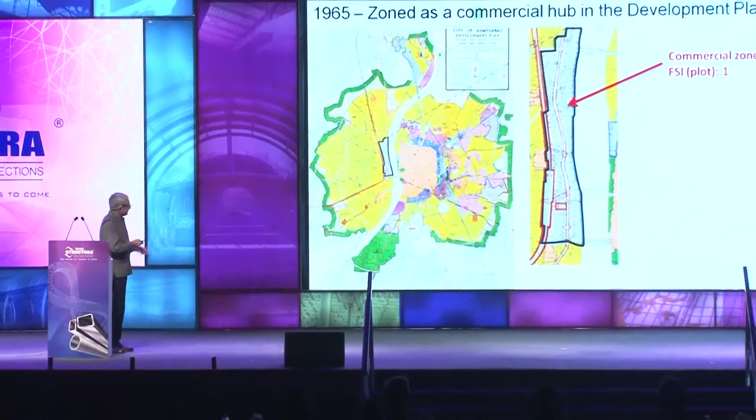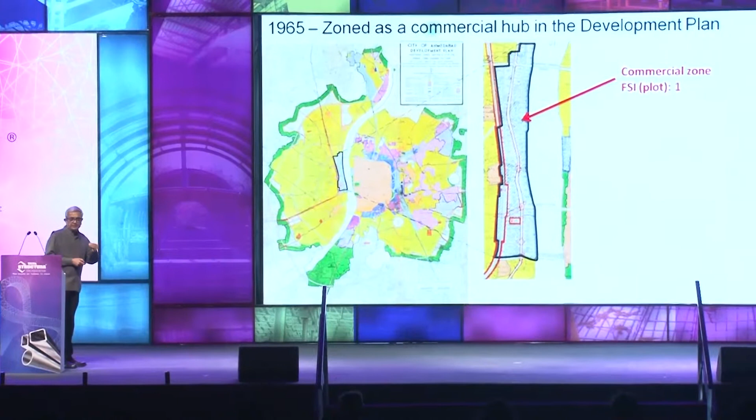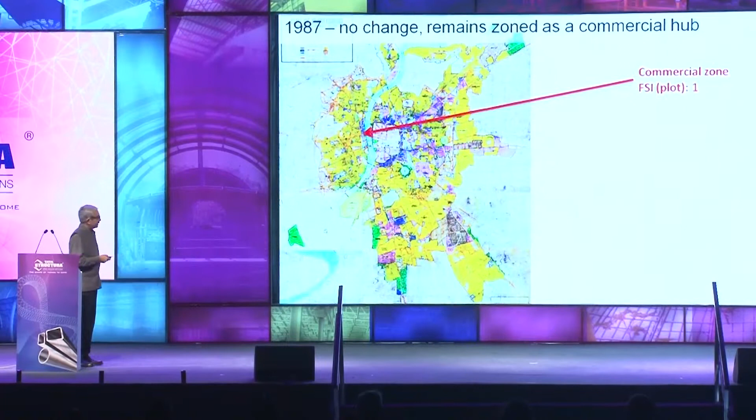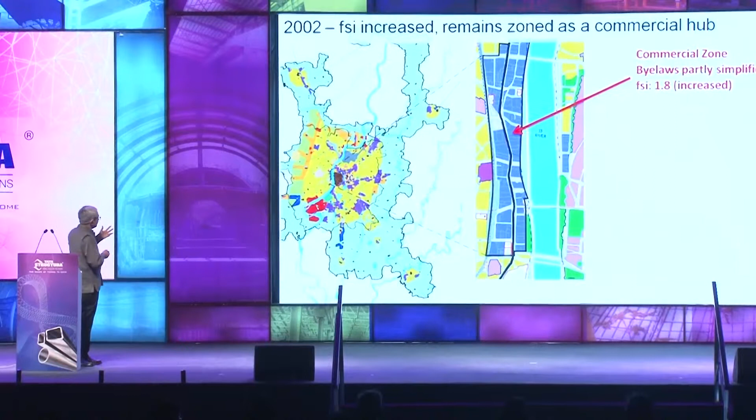In the first development plan of Ahmedabad, this place was marked as the sort of central commercial hub of the city, and like all Indian cities, it was given a low FSI of 1. If you look at the 87 plan, once again, it was marked as the commercial zone, but nothing much changed. In the 2002 plan, its FSI was increased a little bit, and it became, well, little more than what was earlier. Then something important happened in Ahmedabad.

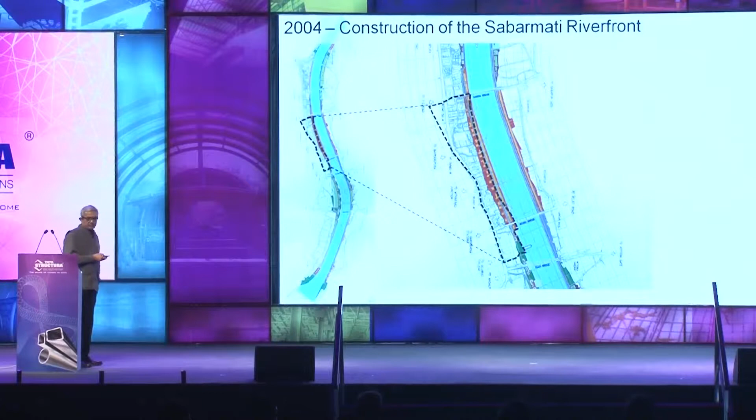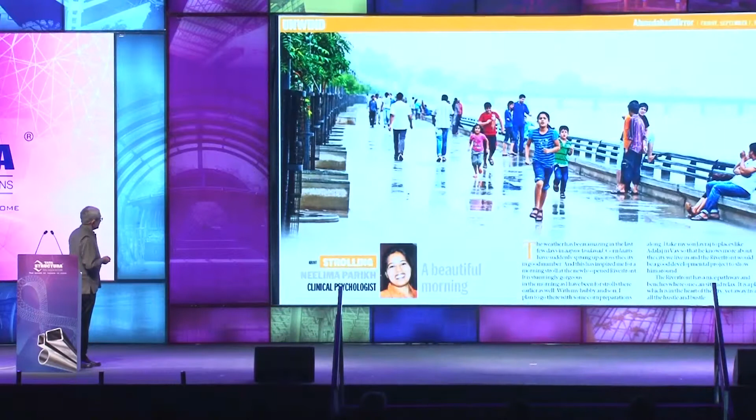Some of you might have heard that the riverfront project was conceptualized and thought out. It started about 20 years ago, and we had a river like this passing through the middle of the city, and like Marine Drive in Mumbai, the two sides of the river bed were reclaimed to create a public space along the entire length, 11 kilometers length of the city. And this is after the work was finished. You got a sliver of land on both sides. That was the public realm for parks, gardens, various things. And today, if you go, this is what you would see in the center of Ahmedabad. And it's already becoming a very important part of the life of Ahmedabad. These are pictures from 2-3 years ago, as you can see.

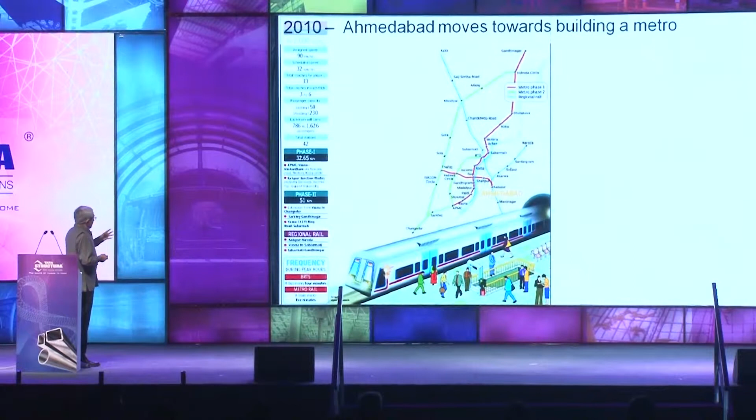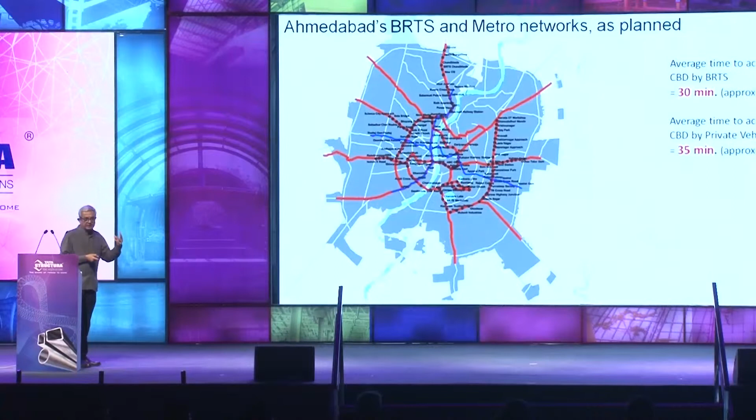Then Ahmedabad also started building its bus rapid transit network that you can see here. And now a metro is under construction. The reason I'm telling you all of this is because of this transportation network that is coming up. Within a few years, it will be possible for people on the outskirts of Ahmedabad to come to the center of town within about 30-35 minutes. On account of this, the demand to build more floor space in the middle of the city is definitely going to intensify. It has already intensified, but it will become more. But you know, like all the cities, everybody complains that the city is already congested. How can you put in more space here?

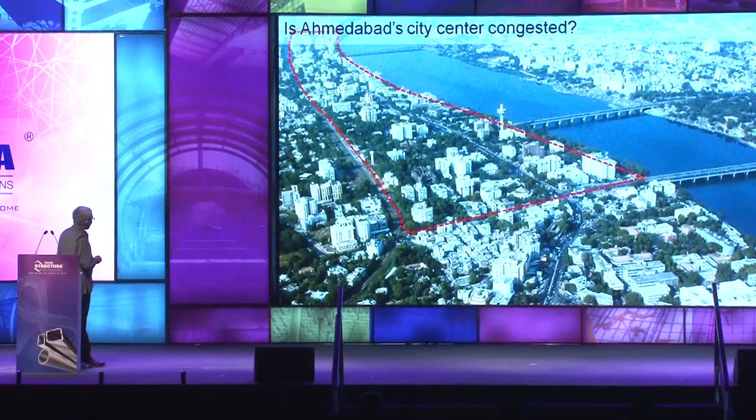Well, Ahmedabad certainly doesn't look like this. In the center of Ahmedabad, there are still small buildings like this. Even in places like Mumbai, Calcutta, there are small buildings like this. And the new buildings coming up are also pretty tiny and small. Ahmedabad city center, we all realized, like many Indian city centers, is not congested. It is just poorly planned. What is poorly planned here?

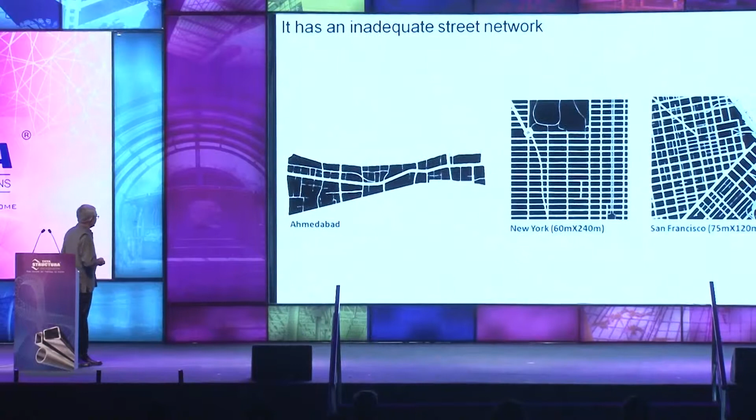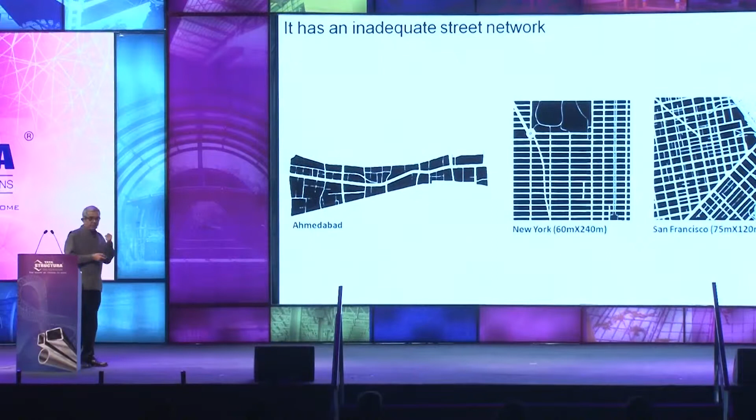First of all, the street network. These are all at the same scale. You can see on the left-hand side is Ahmedabad, and you can see New York, or you can see San Francisco, all of them at the same scale. You can see that New York and San Francisco have a lot of built density, but they also have a very nice grid of streets, which is what makes it possible to have a lot of density in the center. Ahmedabad doesn't have that grid of streets.

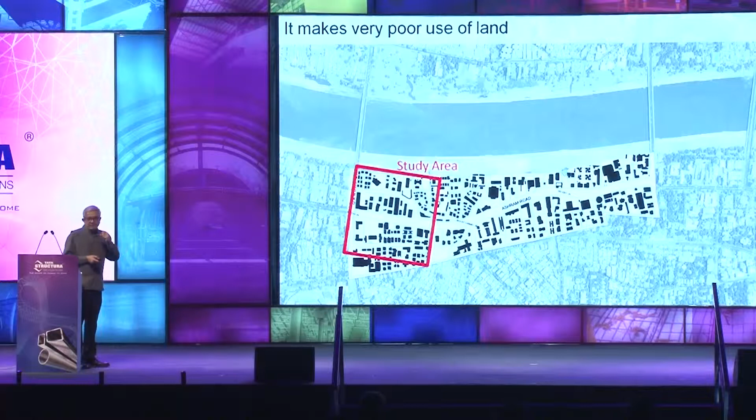Ahmedabad streets are not at all pedestrian friendly, while we have all been abroad where they're very pedestrian friendly streets. Actually, if you look at it, and this takes a little bit of attention, the way our cities in India use land is very, very poor.

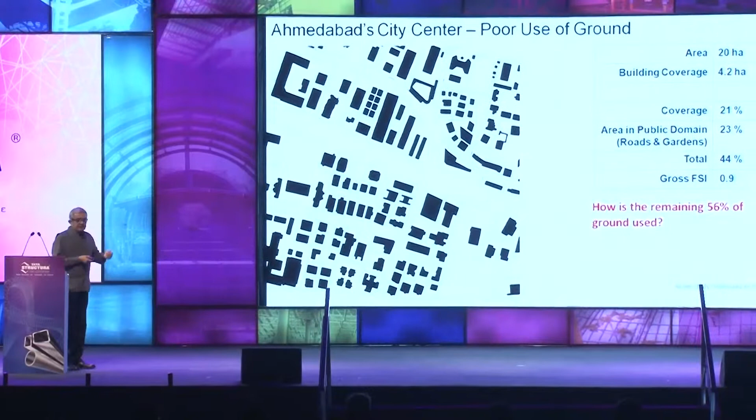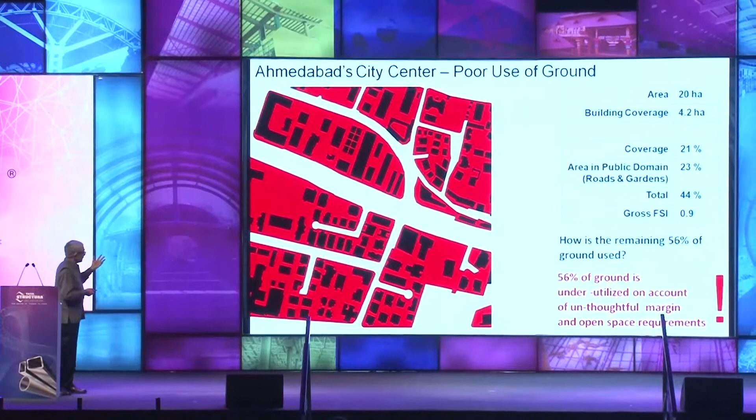If you look at the center of Ahmedabad, like many cities, in this area the buildings cover only 21% of the ground. The streets cover 23%. So where is the remaining 56% gone? Well, all of it is gone in the wastage of land around buildings, which is required because of our building regulations.

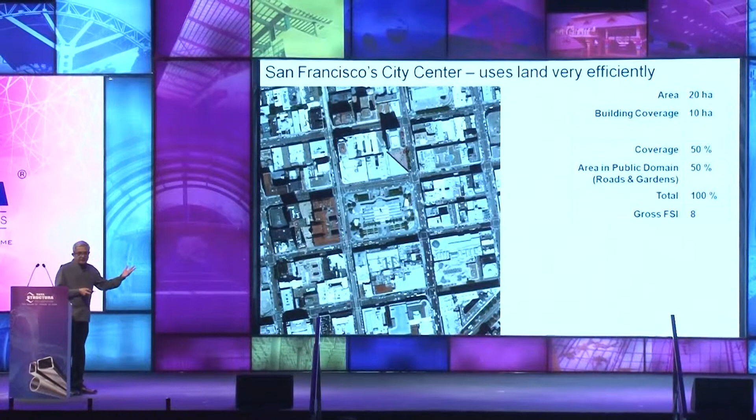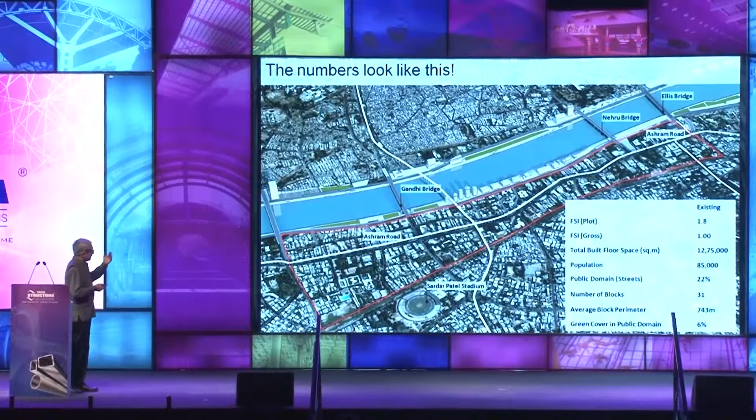If you take San Francisco, half the area is in streets and the other half is under buildings, as you can see here very clearly. This is the buildings and the rest of it is all streets. That is why it doesn't seem congested. Well, Ahmedabad, if you look at this city center area, has a very low FSI of 1, and it has only 22% area in streets, and it has only 6% green cover.

So we have to change this. We have to make this different. Why can't Indian cities be like these cities, or the cities that we see here, which have a lot of floor space, a lot of infrastructure, and are also well serviced? Well, the plan of Ahmedabad to tackle this challenge is as follows.

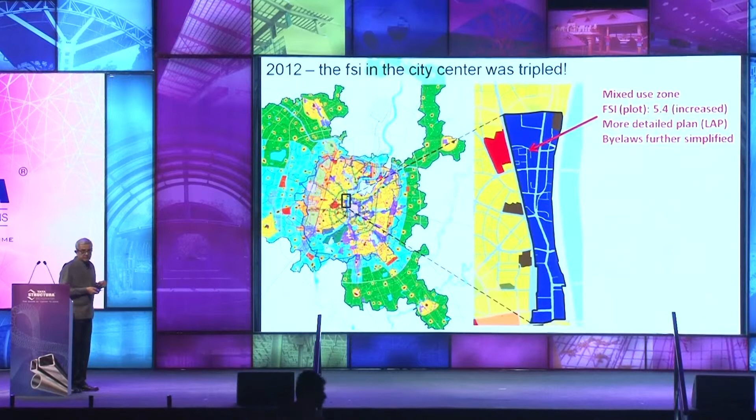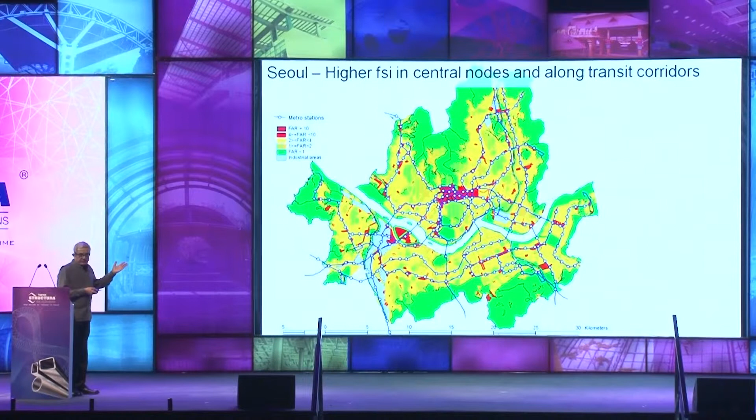The FSI of Ahmedabad was first increased. In fact, it was tripled from 1.8 to 5.4. Not only in the center, but along all transit corridors, it was tripled. This is in keeping with cities like Seoul, where you have high FSI along transit corridors, or like Curitiba, where also you have high FSI.

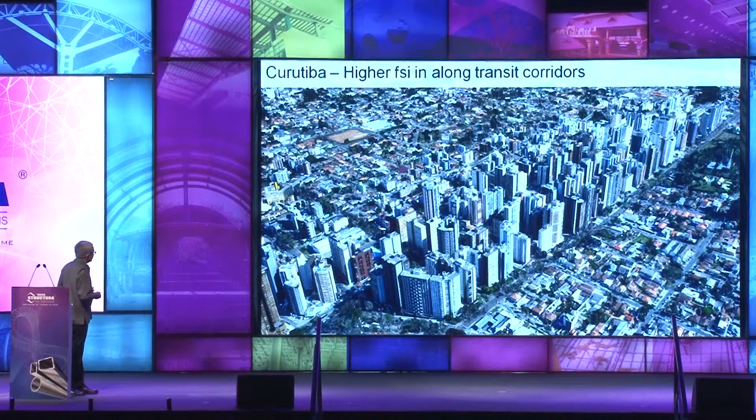But increasing FSI is easy. That requires only writing regulations. The challenge is to ensure that allowing more development does not stress our infrastructure, that more congestion does not result, and that you actually don't lower productivity. So what is the plan that has been made?

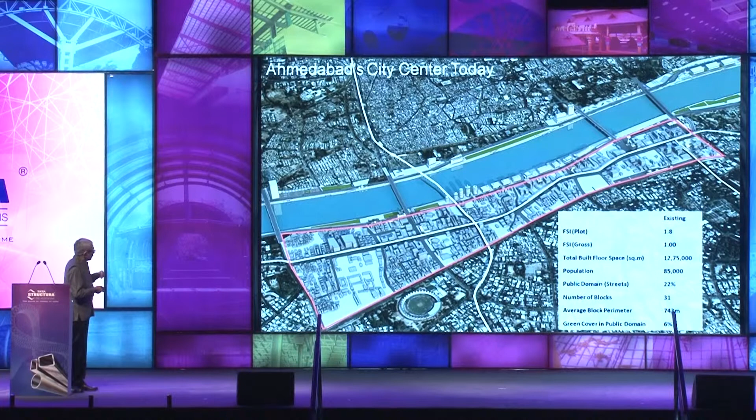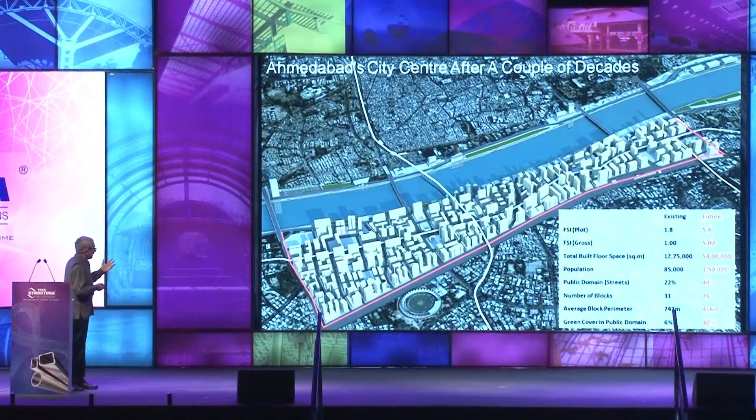Well, actually, Ahmedabad wants to take this area, where the FSI is just 1, and turn it into an area like this. It wants to actually quadruple the amount of floor space that is presently there. And it wants to increase the area in streets from 22% to 40%. So how is this going to be done?

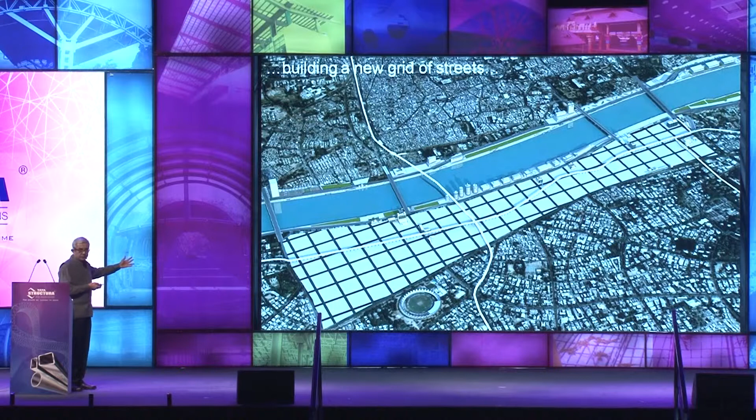Well, of course, you cannot wipe out all the buildings that are existing in the middle of any city and then build some new streets and new buildings. It doesn't work like that. Whatever we do must respect property rights. It must be considered fair. It must be financially viable for developers and also for the development authority. It should be legally implementable, and it should make the lives of ordinary people better.

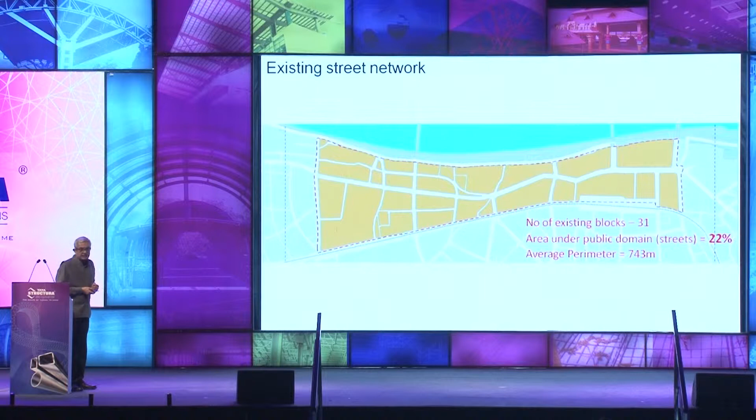So the first thing that was done in the plan is to take such a block, and in this block, introduce very carefully a few streets in the plan. Of course, nobody is going to appropriate the streets right away. Only when the buildings are redeveloped will the streets be taken. So nobody minds these streets being put into the plan. Once the buildings are redeveloped, the street network will improve.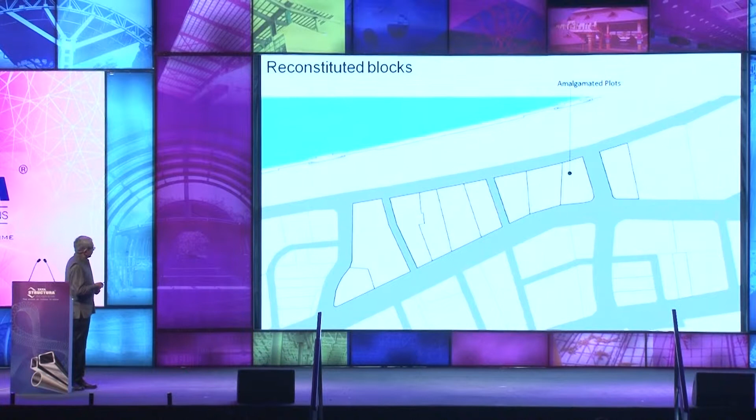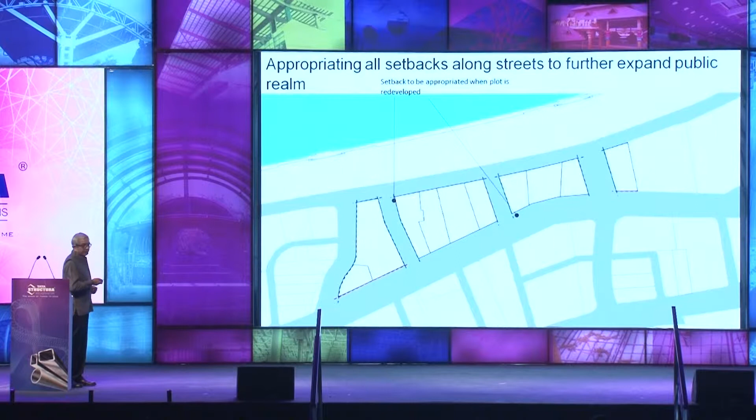Then, for these plots, setbacks are decided. These setbacks are different for the main street and the side streets. The developer is told he is not allowed to keep all of this land. The developer does not mind this because the FSI for that area is given to him to use in the remaining plot. Once you do this, over a 20-year period as the area gets redeveloped, the street network will become like this, and instead of 22%, we'll have 40% of land area in streets.

A small digression, let me explain. A street network is most important. Take San Francisco in 1939. It did not have many tall buildings, but it had a lot of proper streets planned out. Then, over time, they added a lot of floor space, and the city could absorb all of that. Second point to keep in mind: cities redevelop over time.

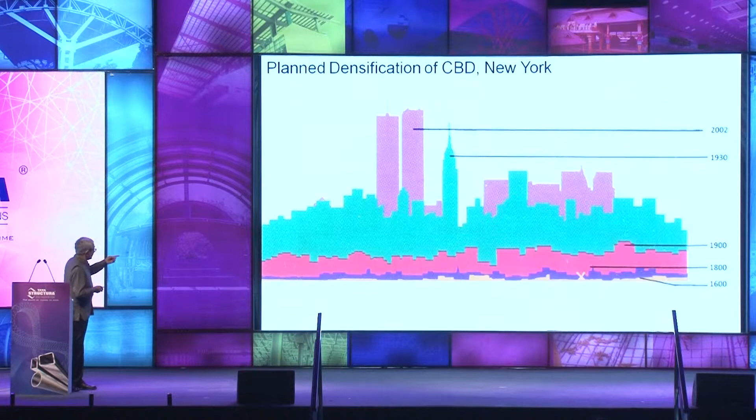It takes a long time to build a city. New York grew very slowly from 1600 to the present times. These are pictures of it. You can see in 1600, nothing existed. Even now, it is being built and added to. Urban infrastructure is not built at one go. When you look at Hong Kong today, with so much infrastructure in the streets and a skyline like this, it did not always look like this.

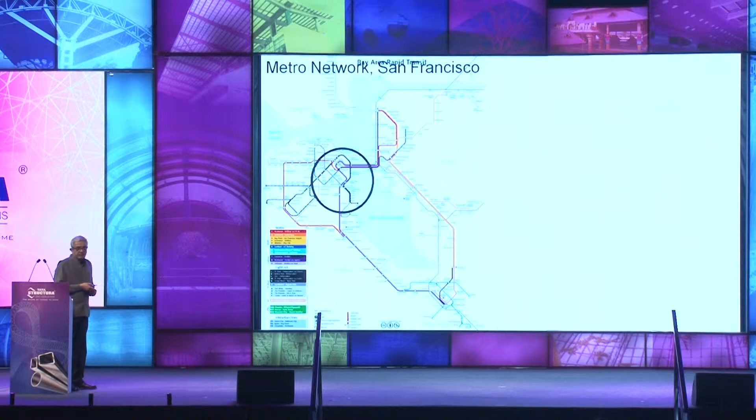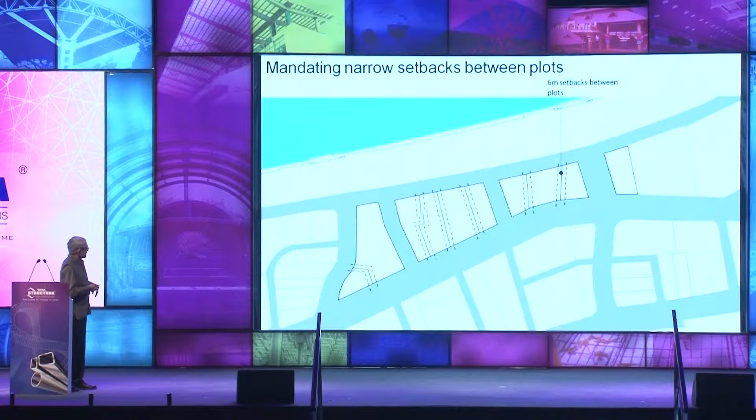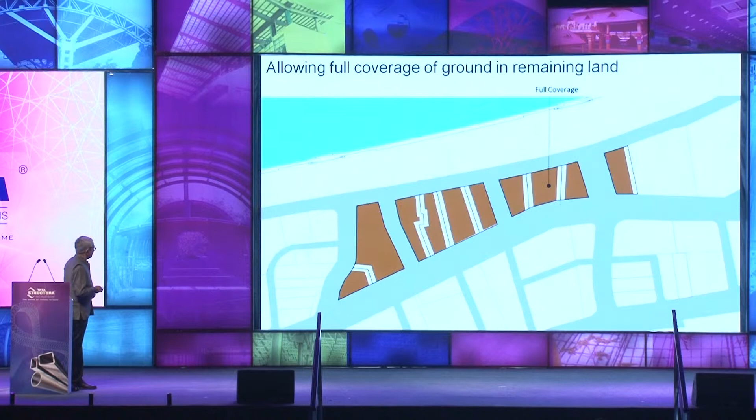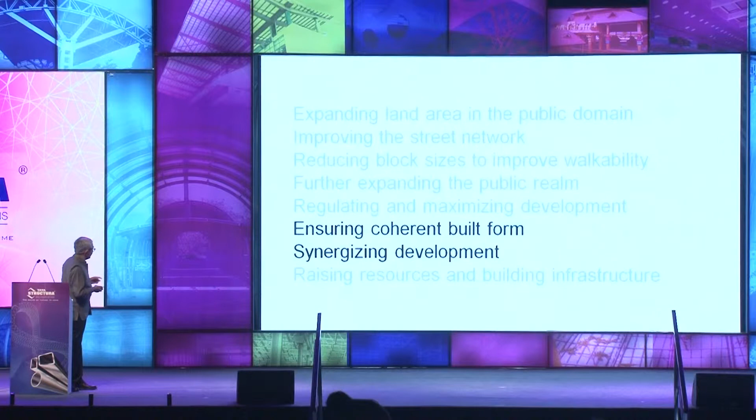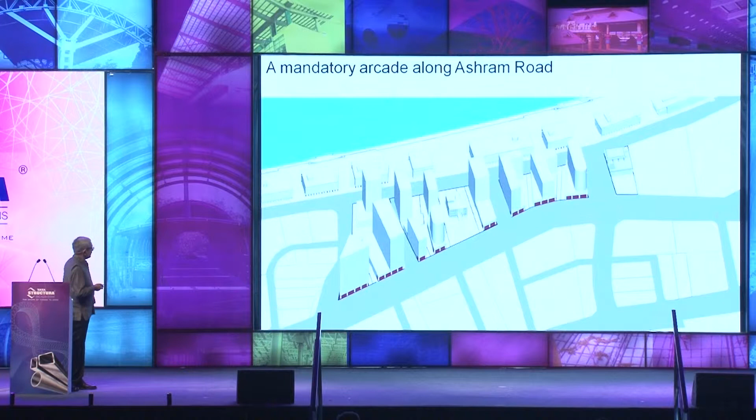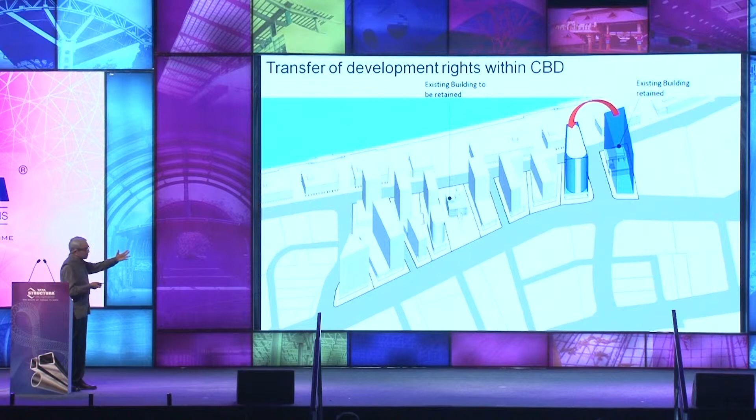Once this has been done, some more laws have been made to make the city look better. So, for example, all buildings have to be in a line, and there have to be arcades, like your Bombay arcades. Once that is done, we need resources. So, only some amount of the FSI is given free, the rest of it will have to be paid for, and that will give the resources. And those who cannot use it will be able to sell their FSI to next door neighbors.

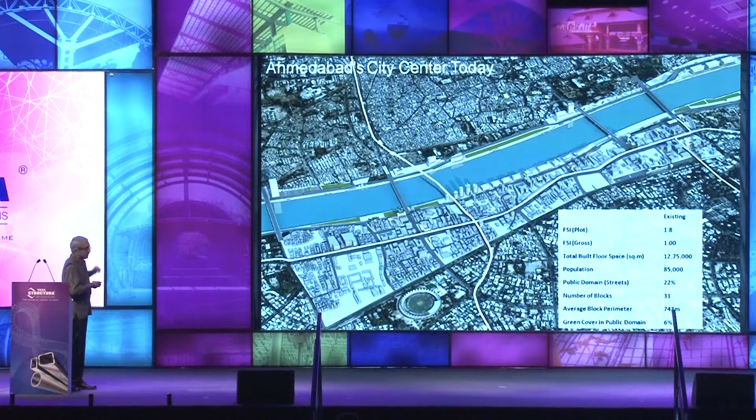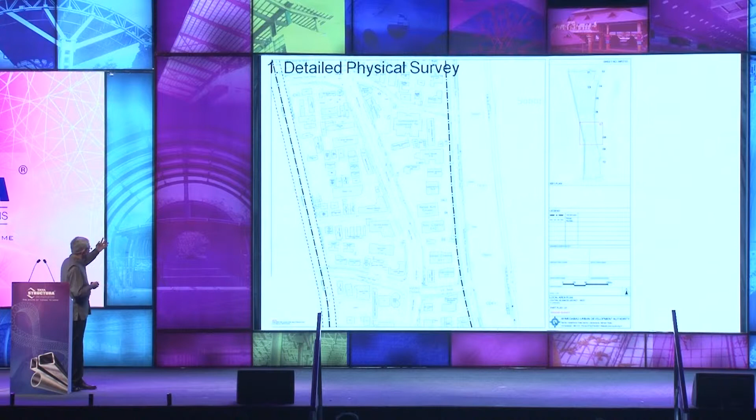When you add it all up, all the buildings will come here, and the rest of the buildings over a 20, 30-year period will be added, and the whole area will be redeveloped. So an area that looks like this will become like this someday. Now we need a detailed plan. This was just the concept, so actually the whole place has been surveyed in detail, every building has been studied, street center lines have been worked out. These are all Sarkari plans with the force of law behind them.